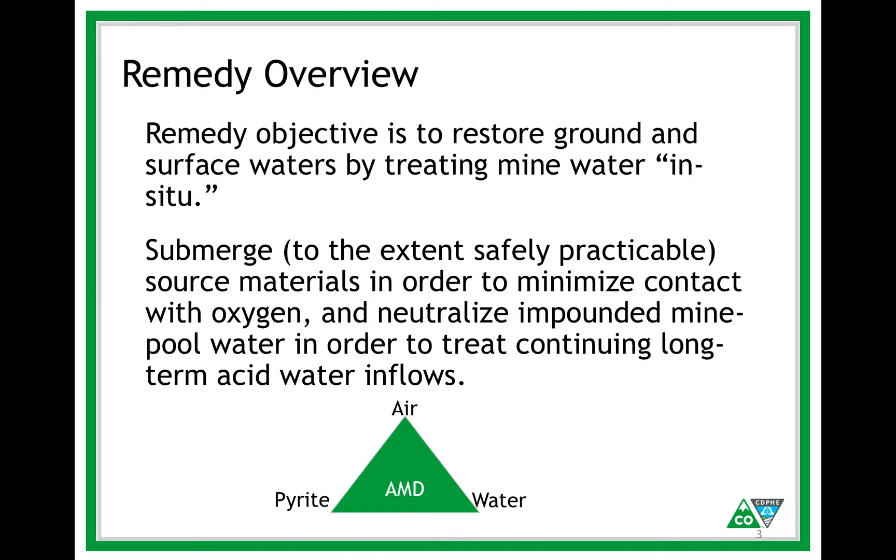So in order to make sure that we sequester that generation, we also want to neutralize the water that's in there. And we did that by providing a source of alkalinity to increase the pH. And that was done by packing a bunch of limestone in behind the bulkhead that was going to be installed. Then the bulkhead was installed along with the flow-through pipe so that we can release water out from behind the bulkhead if needed and when needed.

We've designed a recirculation system so that we can encourage that neutralization throughout the mine pool and not just have it localized around the area of the limestone. Instead, some of the mine water can be pulled through the limestone bed and returned back through the system to include this recirculation to allow for additional neutralization.

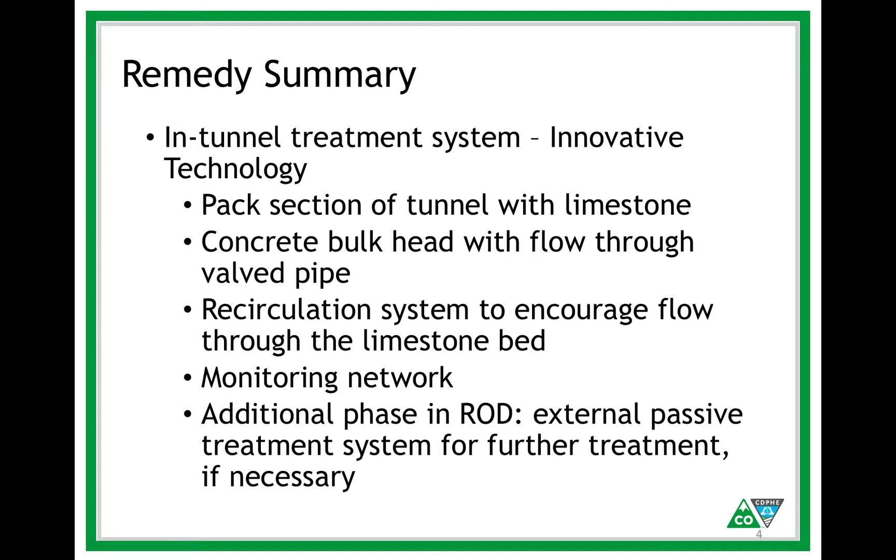There's a pretty extensive monitoring network that I'll talk about briefly. And then this record of decision was actually written with a contingency that after we install this remedy and we monitor the performance for a couple of years, if we can't meet our water quality objectives, we look at an ex situ treatment system as well.

Okay, so again, remedial features. Here's the limestone that was packed in upstream of the bulkhead. Placed about 500 cubic yards of limestone in there. That was as much as we could get in. There was an existing stope that had collapsed and blocked up the tunnel behind that. We didn't want to remove it. And so that was what we could physically fit in the volume of tunnel that we had.

The bulkhead itself is a 15-foot thick concrete plug with some pipelines that go through it. So this is a 12-inch pipe here, and it's valved. And then there's also a 3-inch pipe up here that goes through that bulkhead as well. And we're in the mine workings about 650 feet at this point.

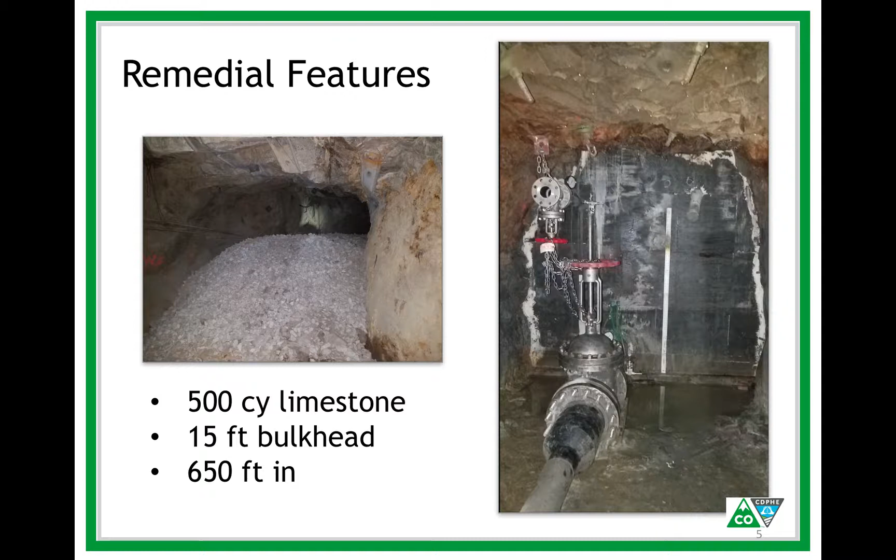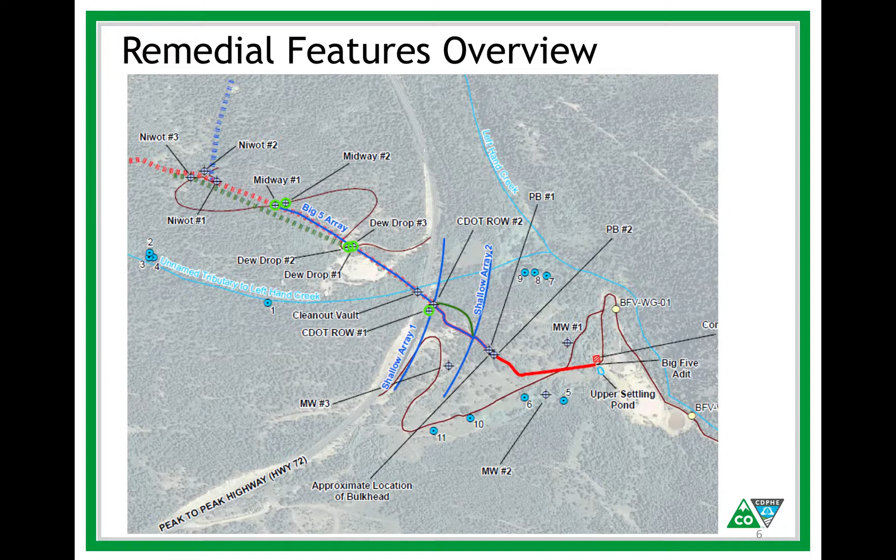Okay, and this shows the overview from the surface. So here's the mine waste dump prior to the reclamation work that was done on the surface. So here's the adit discharge. The mine tunnel follows back here. So this is the location of the bulkhead. Then the recirculation pipeline, we're pulling that water again through that limestone bed, sending it back up through a pipeline, and reintroducing it into the system upstream to allow for that continual recirculation. And then of course there's other monitoring features.

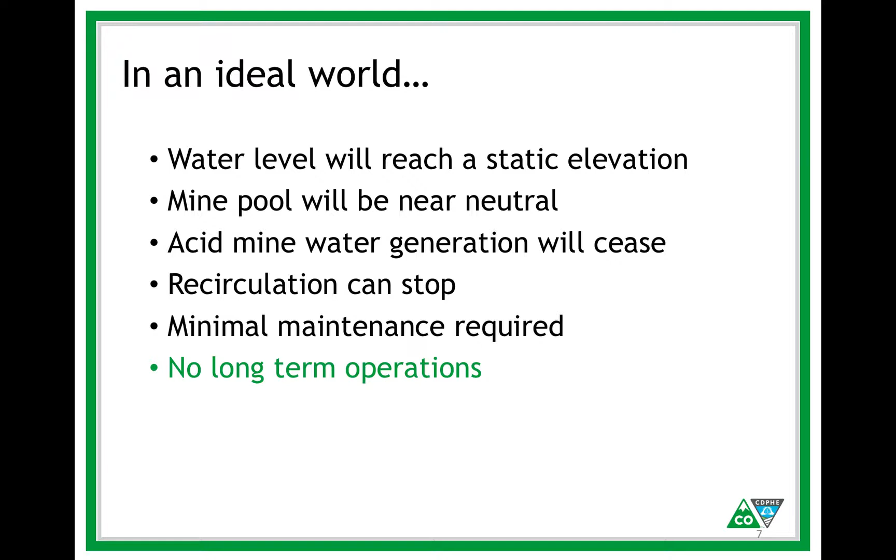So in an ideal world, if everything goes according to plan, the water will reach some static elevation that was pre-existing. The mine pool will be essentially neutral. We won't have any more acid mine drainage generation occurring, and we can just shut down the system and won't have any maintenance required.

But in the real world, we know that there's a lot of things that can go not according to plan. We may have to control the water level. It may get too high and we have to allow for controlled releases out of it. We may have problems with the recirculation system. You know, there's scale that can build up or precipitates that can clog things up. We may have ongoing sources of metals and generation of acid mine drainage. And we might have to add in more neutralizing agents. And again, we might need that second phase of treatment with the ex situ biochemical reactor. So we need to be adaptive to the system.

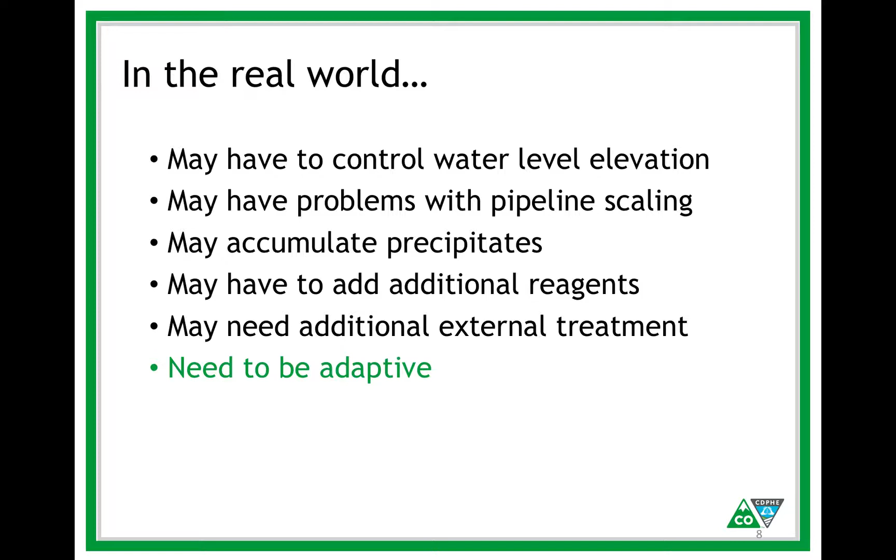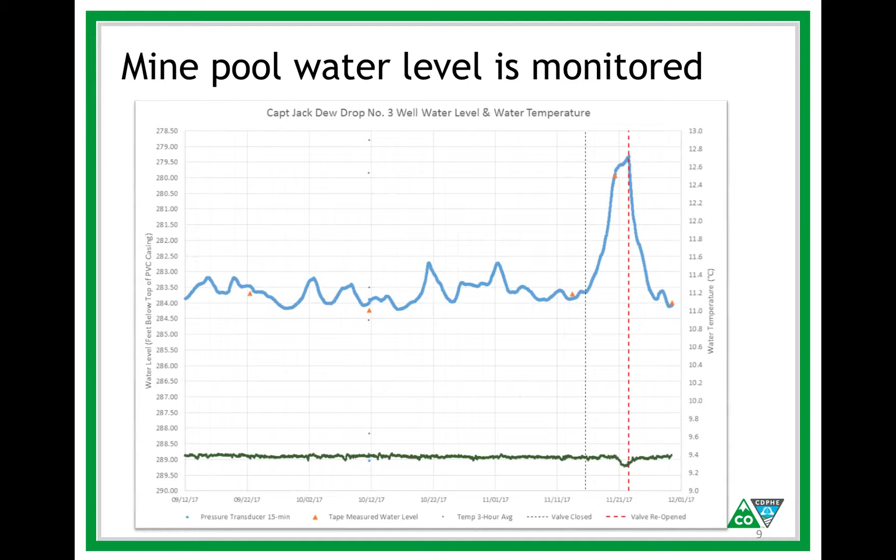So the idea is, we've got the bulkhead installed, we're going to close the valve, and we're going to start monitoring the water level. So we did a very brief test on it just to make sure that the pressure transducers and everything that were installed function properly. And so you can see this is kind of a continuous reading of the elevation of water behind the bulkhead. So Mary, what's that water level going to be in the end?

So Joey just asked a very good question, and that is, what will be the water level of the mine pool? Well, that's a great question. And again, we don't fully know the answer to that. What we do know is it's not going to go over 211 feet, because that is our first opening. If you look at the elevations here, this is the well that we put in order to be able to pull that water through the limestone system, and that's 211 feet higher.

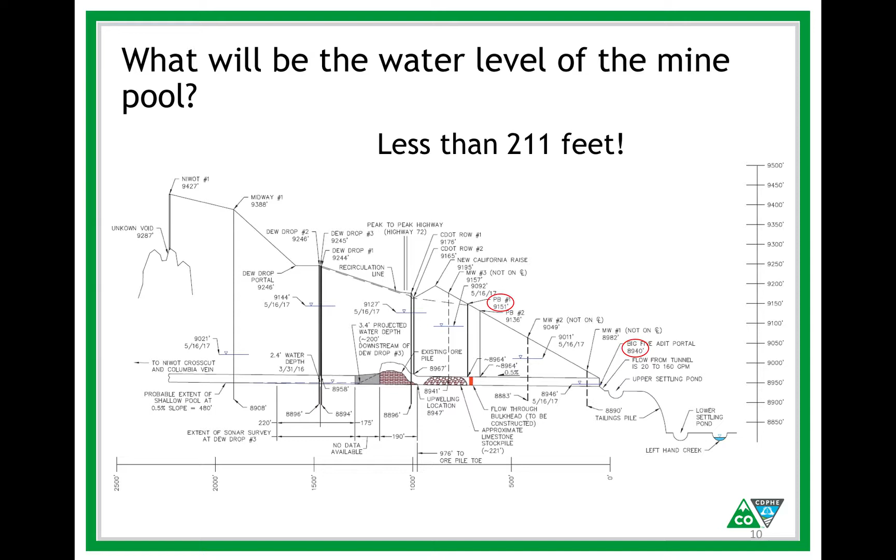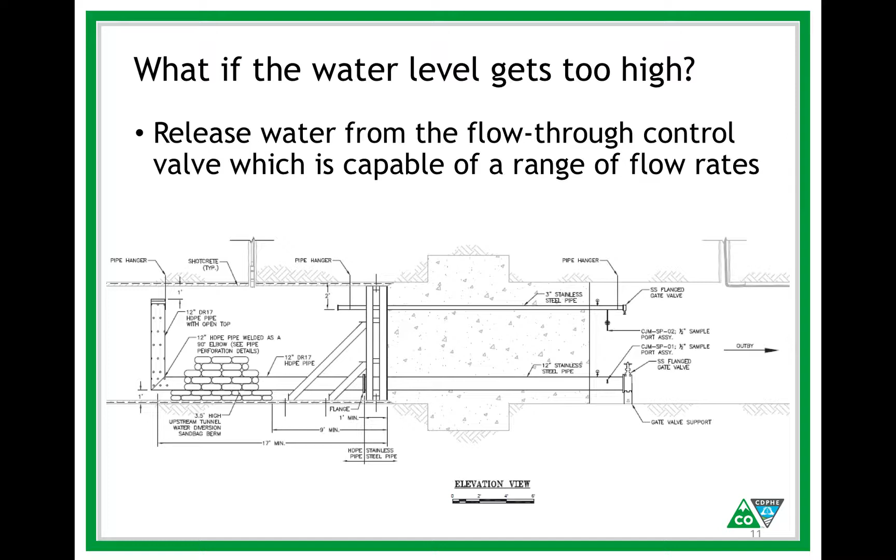So what are you going to do if the water goes that high? So if the water goes that high, that's a great question. What are we going to do? Well, we can release water. Again, we've got these flow through pipes installed in the bulkhead. And so we've got this 12-inch pipe. This kind of shows the profile view. And it's got these perforations on it so that we can take water through there and release it in a controlled fashion if we need to.

And what if that pipe clogs, Mary? Yeah, that's true. The pipe might clog. That's a good question. So, if that pipe clogs, well, we've got contingency for that. We've got another pipe that goes through the bulkhead. We've got that other 3-inch line that's up higher that ties into the same piping system, and that can also control the level of water. We can discharge it out through the portal.

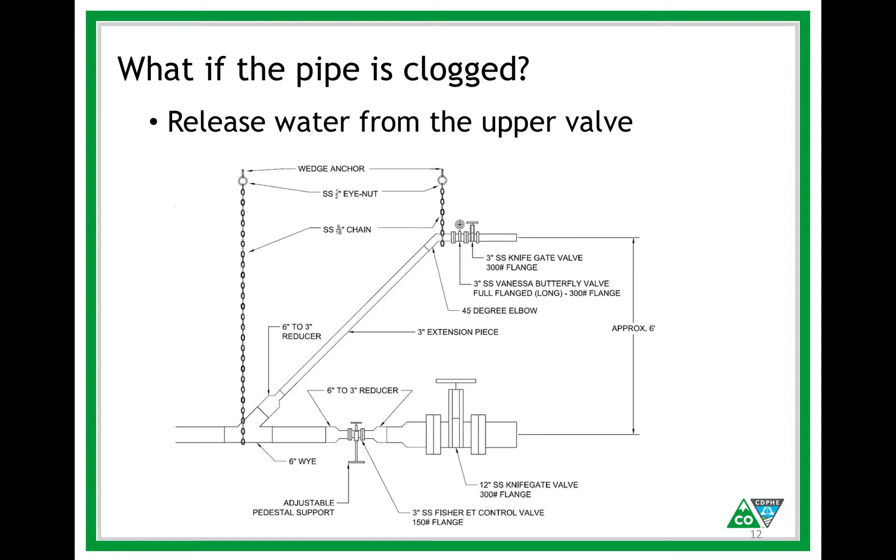Okay, that's great, but what if that pipe clogs? Okay, so that pipe might also clog. Now we're getting crazy. Well, if that pipe clogs, we still are okay, because we've got 3 borings that directly go into the mine workings. And in an absolute emergency situation, we can go ahead and pump water out of that and still control it in a managed system. So what do you do if the water comes out as contaminated seeps?

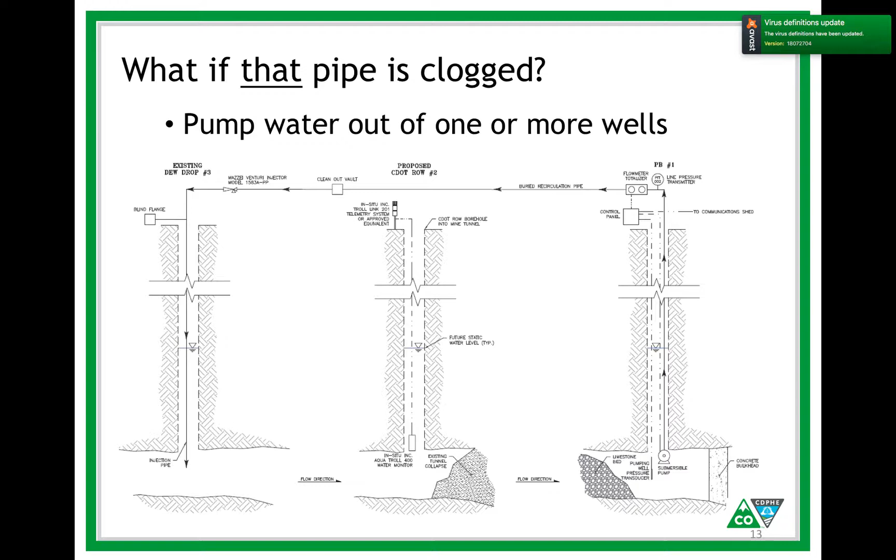So, okay, maybe the pipe doesn't clog and the water doesn't get too high, but it forms these seeps that are contaminated. Well, we need to make sure that that doesn't happen. And we've done that by doing an inventory of the existing seeps that are there. We've got some background data. We know what the existing water quality is.

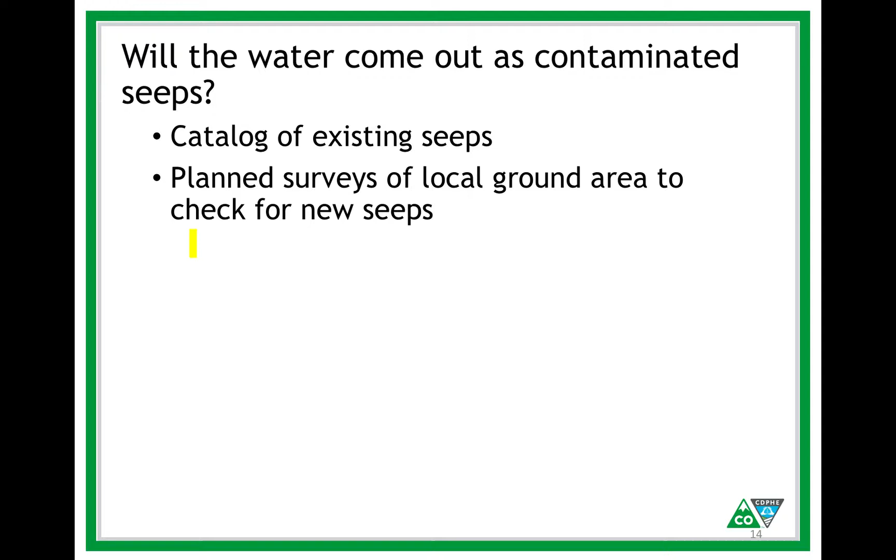And as the level in the mine pool continues to increase, we're going to do additional seep surveys. So we've planned that for every 50 feet that the water level comes up, a new seep survey will be performed. So you can see the aerial extent at 50 feet, 100 feet, 150, and 200 feet. And of course we know it's not going to get above that. What do you do with nearby groundwater? Will that be impacted?

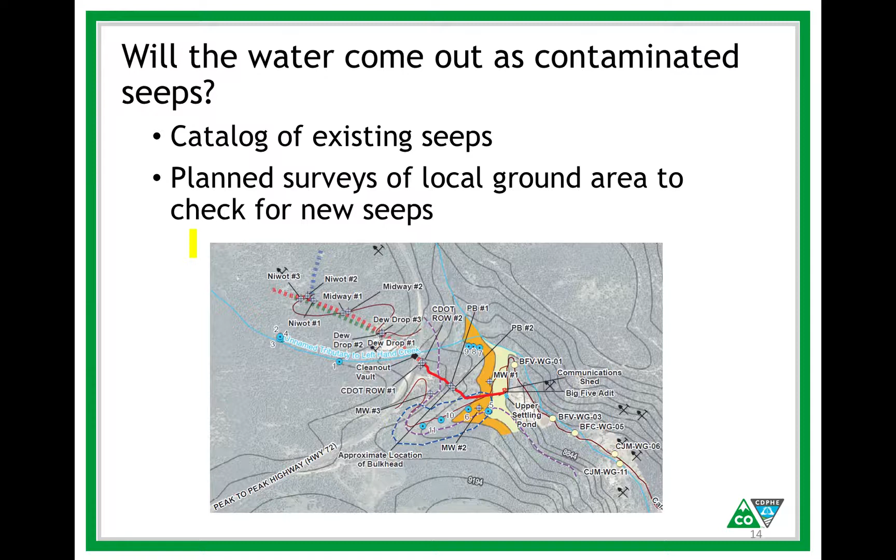You know, there's a lot of frustrations with being a project manager. So one of them is you gotta realize what you don't know. So maybe there's not seeps going out, but there's additional impacts to localized groundwater. So this system includes an extensive monitoring network. And what we've done is install a series of ERT arrays, electrical resistivity tomography arrays.

You can see there's a series of these lines. This one goes along the spine of the tunnel. There's 2 lines that run perpendicular to it, and then there's several lines that run down the borehole so that we can monitor the mine pool as it's filling. All of these ERT systems report back to a central data communication system, and we've got internet or satellite capabilities so that we can collect that data and process it.

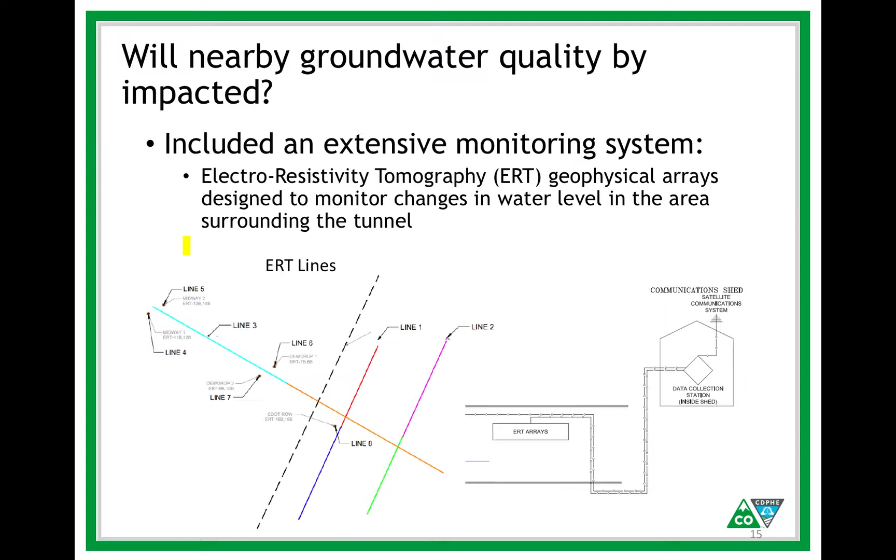So again, as the mine pool fills, we're going to process this data and look for changes in conductivity or resistivity. This is pretty fancy stuff, and we've got a lot of faith in it, but just to make sure, we've also got monitoring wells that have a lot of water quality meters in them. So these are standalone systems. They collect water quality parameters. Again, it's connected through a satellite system, and so that data is available remotely.

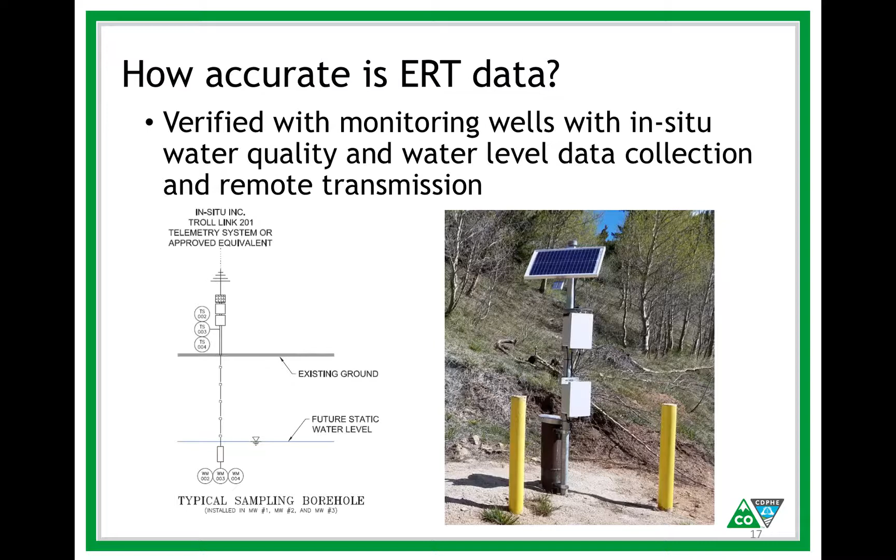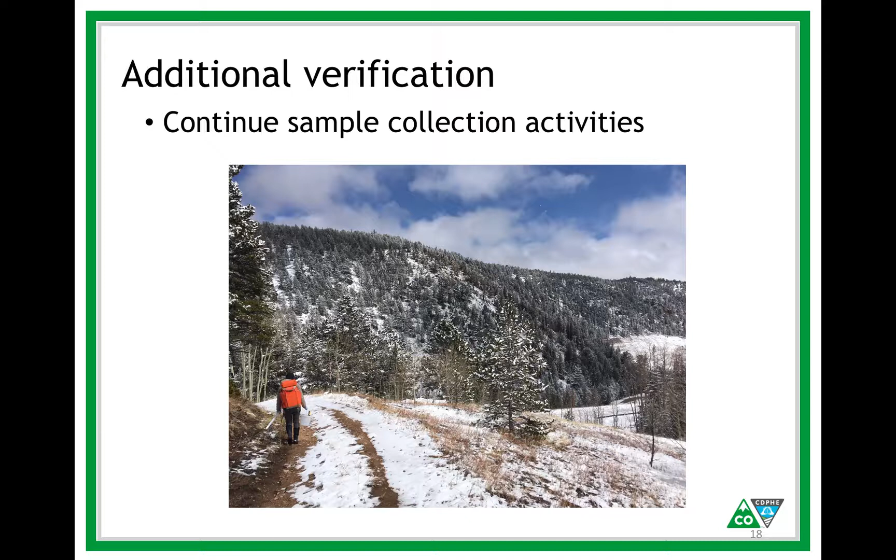And of course, old-fashioned sampling. We're also going to continue a very rigorous and robust sampling program just to verify the data that we're getting is right. When the recirculation system is running, again, we can remote into it. We can check to see what the water level is behind there, what the flow is, and make sure that it's running through that limestone neutralization system.

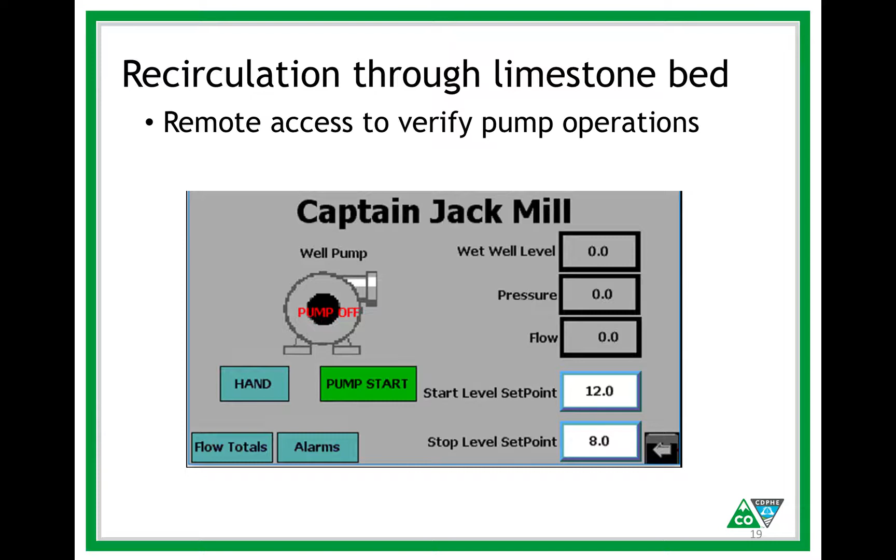So again, other contingencies. So maybe the recirculation system runs, but the pipe clogs. Well, we installed 2 redundant pipeline systems. So one's connected up. If that one clogs, all we have to do is uncouple that one from a couple of flanges, fit the other one in, and we're good to go. And that gives us an opportunity to replace the one that's clogged if needed.

What if the pipe leaks? Again, we're going a few hundred feet on ground surface. We don't want it to create a problem. And so both of the pipes are in a secondary containment. So if there were to be a leak, it would continue down that secondary containment and back into the mine pool system.

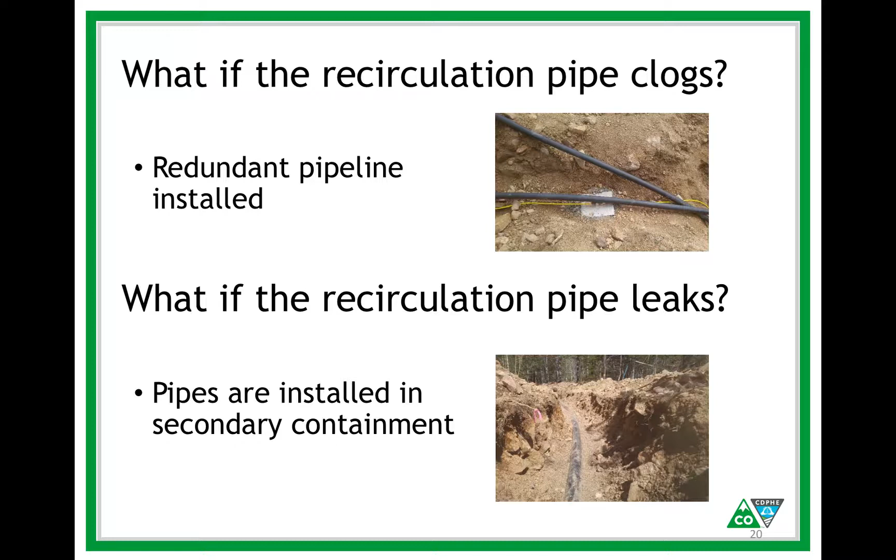So what if the limestone that we put in there isn't enough to neutralize the entire mine pool? Well, we can add additional alkalinity, either in the form of a caustic soda, sodium hydroxide, or a lime slurry. This is the reintroduction location. So you can see this goes down into the mine pool. And we left a 2-inch line here with a blind flange on it. So if we need to connect up any other type of a chemical tote or something, we can add additional amendments into the system.

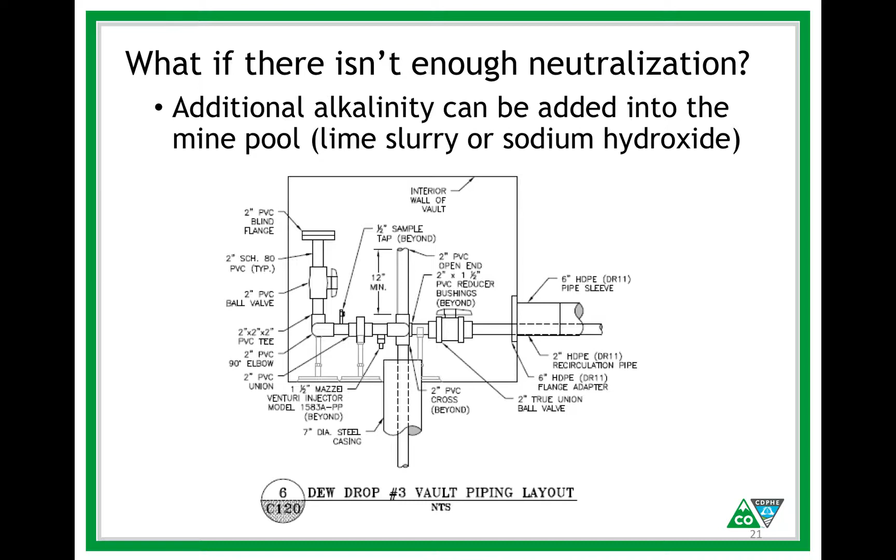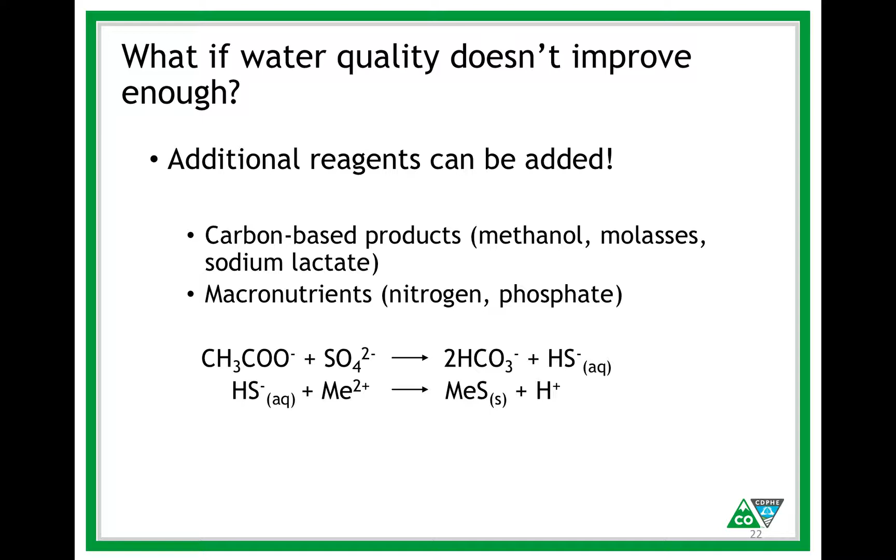Okay, if neutralizing it still doesn't do the job, we've got other plans that we can incorporate. We can add in additional reagents, some of the stuff that maybe Jim was talking about. We can add in a carbon-based product to help promote that sulfide precipitation that we're hoping will occur in here. And if it still doesn't improve enough, we still have the contingency of the ex situ biochemical reactor, which Katie talked about in quite a bit of detail.

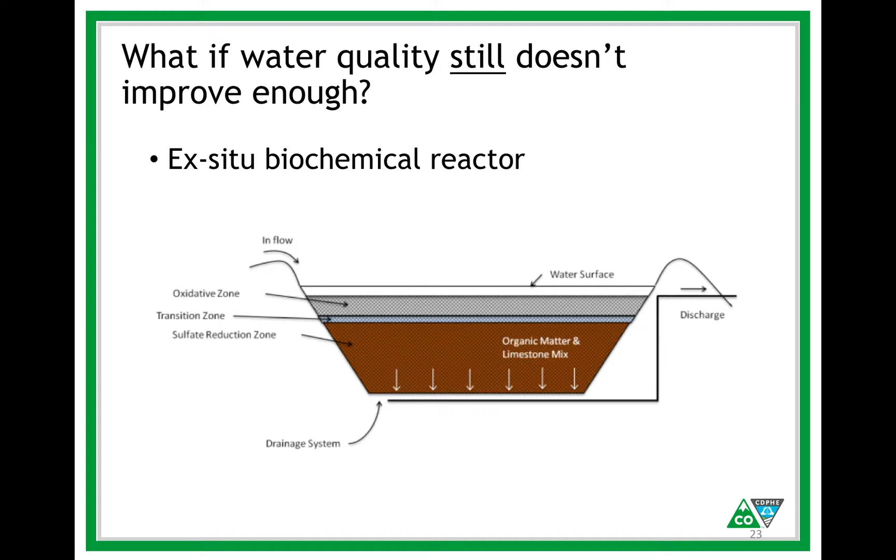So, in conclusion, we are trying a relatively novel approach here. Again, trying to get out of the perpetual active treatment system. There's a lot of unknowns. We realize that there's a lot of unknowns with this, so we have to design a lot of flexibility in the system. We have to be able to adapt to the changes that we see through the monitoring program.

We don't know if everything's going to work out perfectly. Well, everybody kind of hates to be the guinea pig, but we are in the situation. There might be things that we learn that you're not supposed to do. And we can do a presentation on that next time, right? But so we're trying to figure out how this works and what we can adapt it for at other sites.